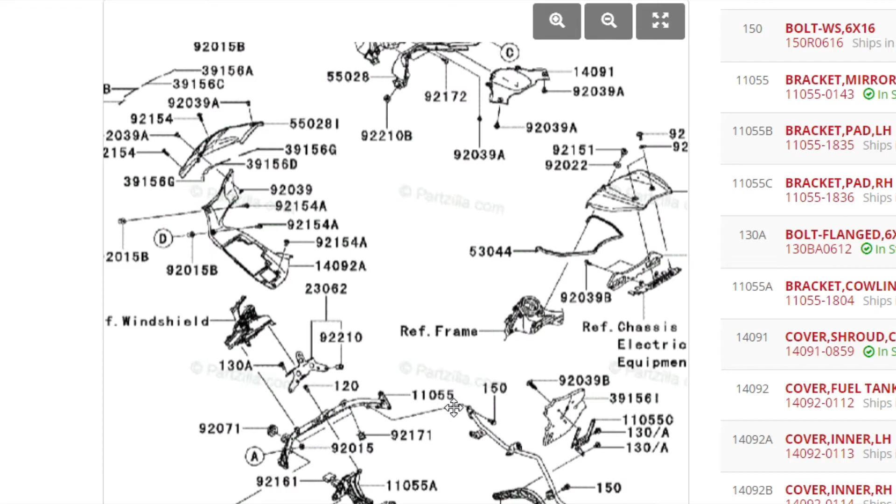And once you figure that out, even on a complicated or busy drawing like this, the next thing is to simply reference the number that identifies it to the number over here in the list. Now, Kawasaki, and I'm not sure about the other ones, but Kawasaki for sure likes to use essentially a 5-digit part number dash 3-digit. Now, you don't see the dash 3-digit up here. You simply see the 5-digit first part of the hyphenated part number.

So let's take this 92039 here for example. If we wanted that, I'm not really sure what it is, but we'll take a look. 92039, we scroll down here.

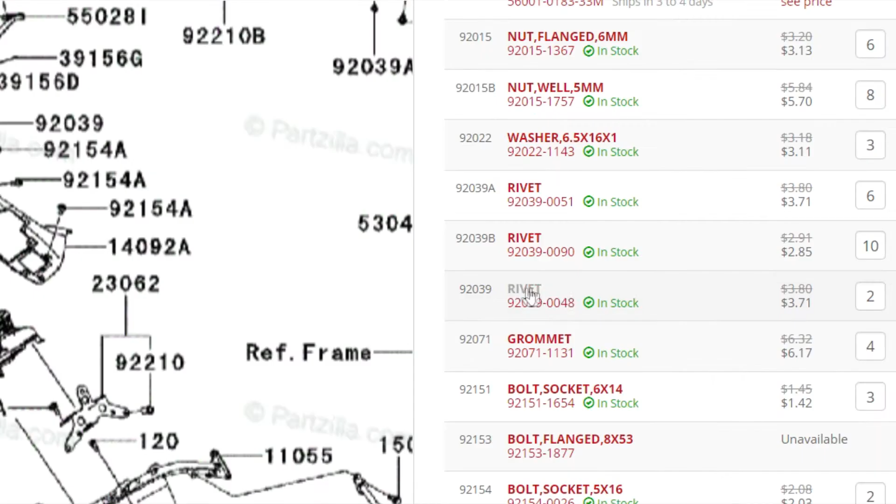It's one of those push nails, or rivets, those plastic deals that always break when you try to either take them out or put them in. If you needed those, it'd be pretty simple to order them, or if you wanted just the part number to check with your dealer, you can open that up and look right here - here's the actual part number. This is actually a -4, some are -3. So 92039 0048. If you called your local Kawasaki dealer and gave them that part number in its entirety, they would be looking at the same thing.

One thing to understand here is that the OEM parts fiches are all the same no matter what place you're looking them up online. So if it's motosport.com or Bike Bandit or whatever, they're all referencing the same material.

Most of them have a drill-down list like this up here. Let's start back at the main screen to show you how that builds. When you open it up and hit Kawasaki, you see how it starts - catalog, Kawasaki, motorcycle, there it is. And then we go to, let's say, 2012, and then to the Concours 14.

It expands out, and the reason this is important is if you go, okay, let me go into here, front brake, and then go, oh crap, I didn't want this one - you don't necessarily have to hit the back button. You can if you want, but all you have to do is go up here and hit the bike again, and it brings you right back to that level, or levels I guess you'd call it.

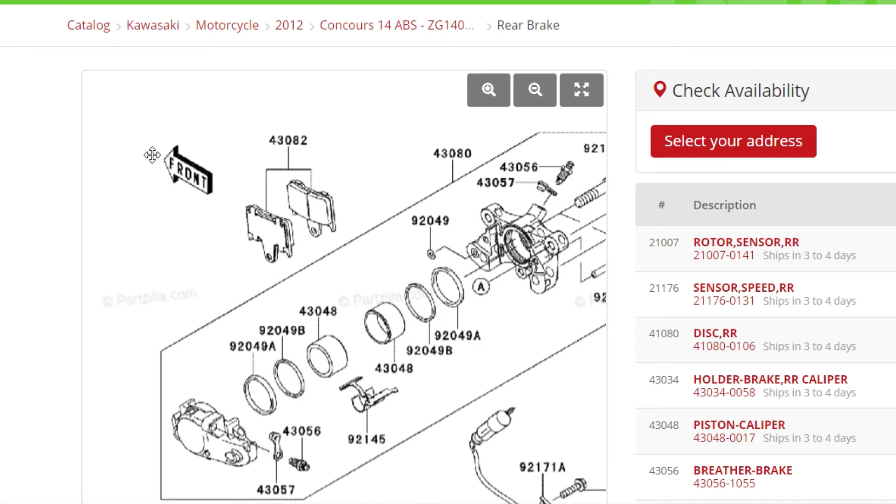So then you can scroll around and look at different things. Let's look at one more - the rear brake. So if you needed brake pads, again, look up whatever parts you need. Here's again that front reference, and so there you go, and then you can pick what you want.

Another thing to keep in mind is on most of these parts fiches, they will give you a quantity that the OEM says is required for whatever this part applies in this assembly, or this fiche. In this case, 2 right there, that you will need for this assembly here. So that's another thing to keep in mind.

Adding it to the cart and doing all that stuff is sometimes unique to the particular website, but you can figure that out. We're going to go over to motosport.com and take a look at how theirs is set up. Now, theirs is a little different, and I have a little experience with this one. I think the best thing to do is just follow this drill-down up here.

You can go through this way too, but if you just go to select riding style and say street bike, and then let's say Honda, and then a 2002 - there it is, my eyes are screwed up here today. And let's look at ST1100, doesn't matter. Okay, so now you get that populated in here, and it shows you 2 choices right there, aftermarket and OEM. If you want aftermarket, that's fine. The aftermarket will be almost exclusively unique to whatever they're selling versus the other ones. But OEM, again, it's the same information, same part by part number.

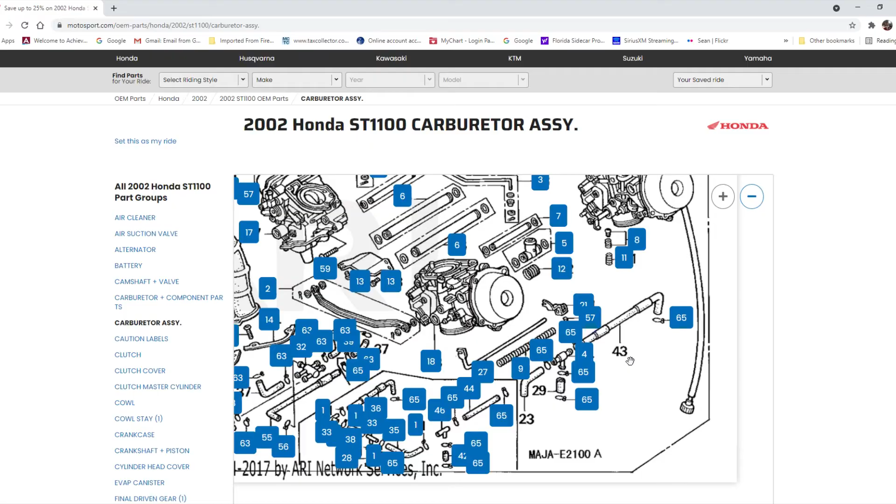So basically, you can also scroll down here and see the same thing. And as you notice, these reference just 1 or 2 digit part numbers, as opposed to that 5-digit slash-3 or 4 digit that Kawasaki does. So like, for example, 43, so forth, 65. Let's see what 65 is if we go down here on the list. I don't even know, I've never been in this fiche before, but it just looked good. Nice bike, by the way, ST.

So this is a clip for a tube. They have it in stock. And we click on it, and they don't have a picture of it, but they do give you the Honda part number. This is definitely what a Honda OEM label would look like. In fact, it would come in a bag that has this exact label on it. So, unless it's a box, like for something big. So that's pretty straightforward too.

It all depends on the complexity of the parts fiche. So let's go down here back. We're going to go just back to main Honda and start over. And as you can see, every website does it a little differently.

And again, Motosport, you can get to the same place just multiple ways. So here's an entire list of everything that they have, all the way down to whatever year they're covering as far as the Honda parts availability.

I'm going to tell you one other thing about that over on the Partzilla site. Don't let me forget. But let's go up here and we'll go to the. I just saw one I want to look at, which will be pretty, I think, entertaining for you. Let's take a look at this 2020 Honda Grom, little kind of mini bike.

And again, it gives you the same thing with a bunch of pictures. And all you do is just select the system that you're looking for or the assembly you're looking for. And if you need like fuel tank parts, then you'd go over here. And it's a little simpler of a parts fiche to navigate through. But as you can see, this is a fuel injected bike, so it has a fuel pump. And then it has all the associated stuff about that. So again, just buying parts, straightforward, pretty much the same as the other websites that you can go to.

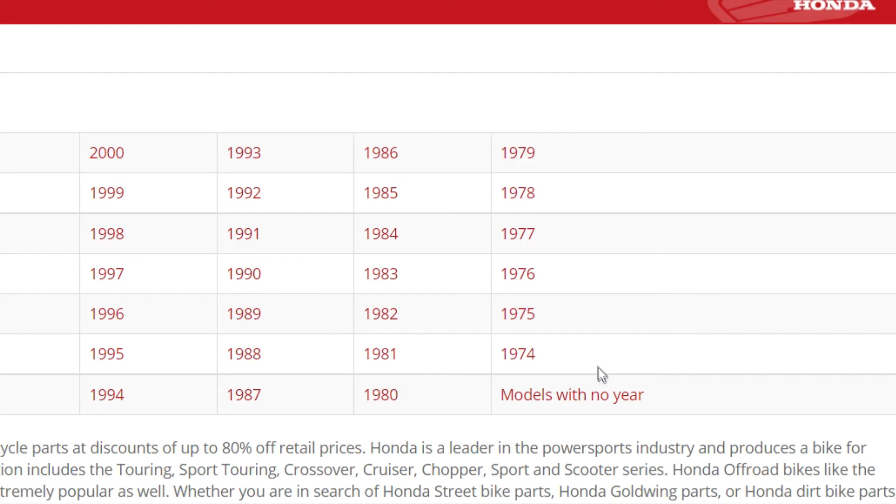I'm going to go back to Partzilla, and I want to show you that one thing about Honda in particular. I don't know about the other brands. But let's say you're working on a really old antique Honda, like in the early 70s, for example, or something, that may be a little bit unusual or before 1974. You see the selection right here. It says models with no year. This is going to be your best friend if you got something like that.

Because you click on that, and then you have all these models that are not necessarily assigned to a year in their system. In other words, you don't look them up by year, you look them up by model. So if you wanted to look up a CL77, you click on that, and it will give you that bike. Now, you have to ask yourself, well, does that year on my machine correspond with this particular parts fiche? Maybe, maybe not. And that's where a little bit of detective work comes in, where if you're trying to find OEM parts and you're using this particular feature on their website, you're going to have to essentially look through it

and see if things apply directly to what your bike is or bike has. Because there are different variations even mid-year that they make changes of. But even then, and this is probably a bad example, but if you were in a different bike, because there's only one CL77A listed here, if you're in a different bike like a CL70 and you clicked on one of these and it didn't quite match up, you just click one of the other choices here. You see you have a K1, K2, and K3. So again, that's part of your detective work. You have to look around and say, what model do I have? Do I have multiple choices in that particular model?

And if you do, then you pick the one that matches your particular unit that you have in front of you the most exact. That's pretty much the simple explanation.

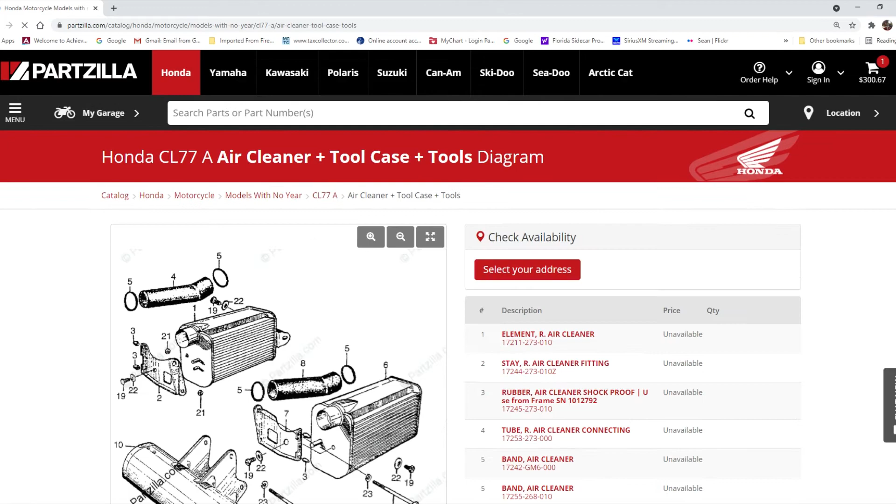So if we wanted to look up air cleaner stuff for that particular bike, and you were like, well, I need parts for my air cleaner, this is where we would look. They even have a toolkit. Good luck getting that. And then this is where you'd go for that.

So what is number 6? This is the Element Air Cleaner. It's currently unavailable, at least new. But let's say you really wanted to get one, and it's in the aftermarket, and you didn't know where to look. What you can do is click on that, take this number, and then Google it, and you're sure to find somebody that sells it in the aftermarket. And usually they reference the OEM part number for that purpose.

All right, so pretty simple stuff. That about covers the buying of stuff straightforward, that particular segment.

Now let's look into using it as a mechanism to see how things are put together. Pretty much the same thing, but you're a little bit more targeted. Let me give you an example of this.

If I go to Kawasaki, I was just working on a 78 Z1R, and I had to figure out something in regards to the steering head. And so this is another nuance of operating in parts fiches: you got to kind of figure out which parts fiche within that model is where the thing you're looking for lies.

So we'll go ahead and get into the Z1R here if I can find it again. There she is, Z1R, the KZ1000 D1. I was looking up a steering head thing. I wanted to see how something was put together before I drove a bearing off the steering stem, because we're going to be replacing those. This is a fairly extensive restoration that we're starting right now for a customer.

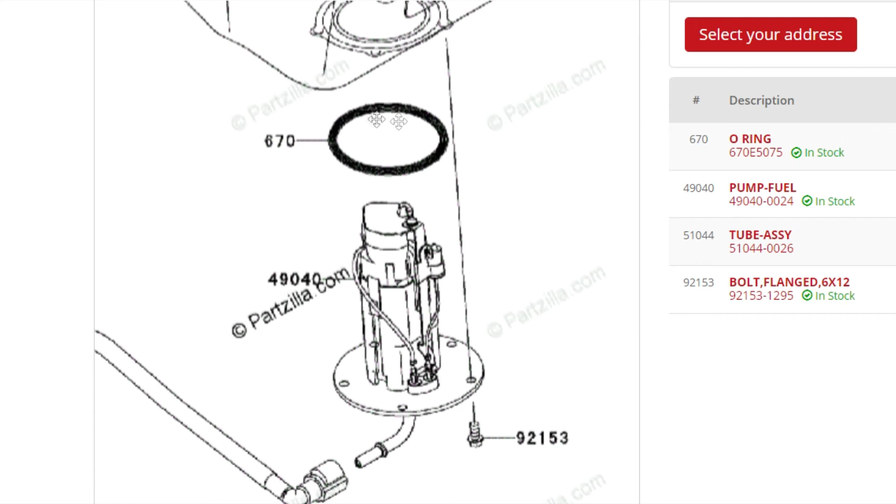Flipping around, as you can see, you have a fuel pump, and the only thing broken out on the fuel pump is this big O-ring right here, and maybe this bolt, but you'd essentially say to yourself, wait a minute, I've got to buy an entire fuel pump. When it says sign in to see price, it's expensive - kind of like if you have to ask, you can't afford it, like buying a boat. So I thought to myself, there's got to be another way to do this.

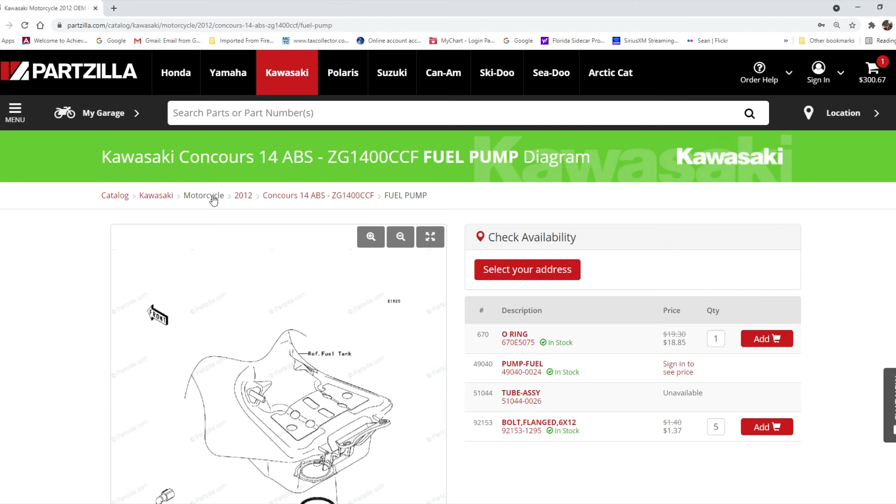So here's what you can do in this situation. We're going to go back to motorcycle, and instead of 2012, I'm going to go to 2016, and click the ZG 1400, the Concours 14 again. Then I'm going to go to fuel pump on that. Let me get down there first, and voila, look what we have - that's not a misprint.

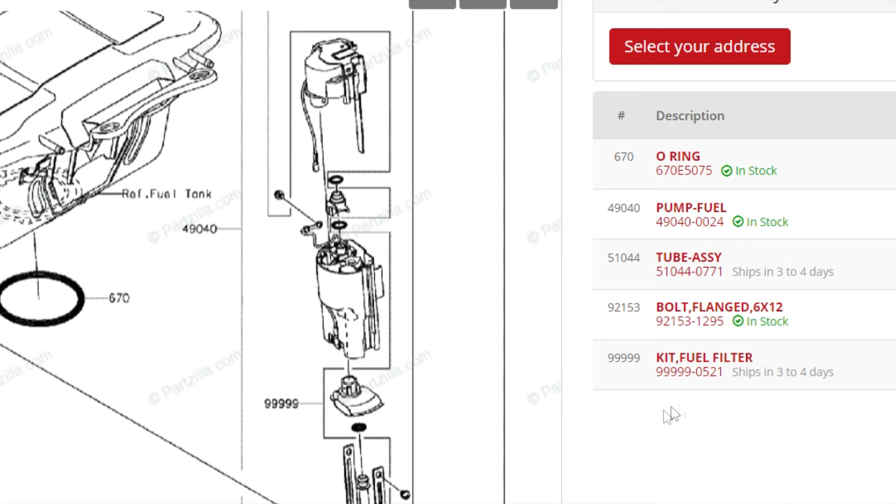They just use 5 nines and whatever comes after, 3 or 4. So here we go, look at this - kit, fuel filter. Now, there is absolutely zero difference between the fuel pump on a '16 as opposed to a '12. They just decided on the '16 to break this out into a separate part you can buy.

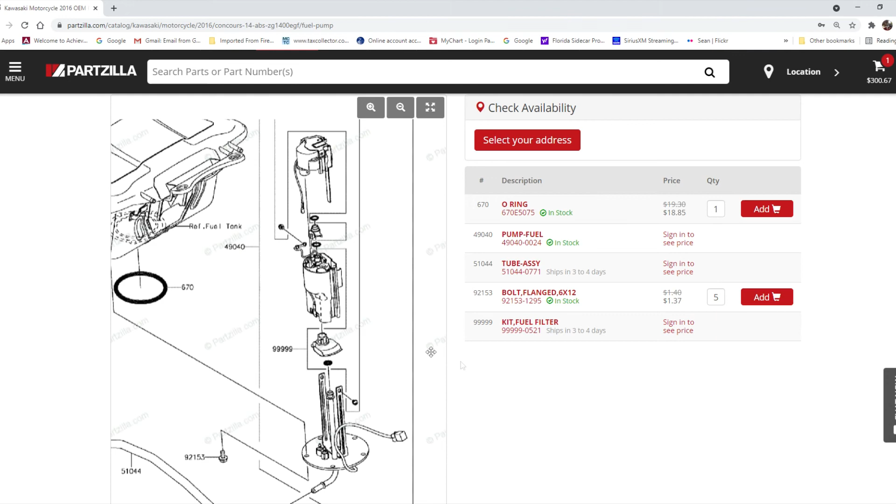That's exactly what I did - I ordered the fuel filter kit. It came with all the O-rings and everything, and I installed it, and it worked perfectly. So that's one quick example of how you can look around and figure things out. Forums can help, and Facebook groups for your bike can help too, because somebody may say, hey, don't go to a '12, go to a '16, and you can find it. So that's just another example of what you can use this for.

I'll show you one other quick thing, and that's aftermarket - not necessarily OEM parts. I like to use Bike Bandit for things like tires, because I think they have a really good engine for looking through and getting tires. If you need a set of tires, it's pretty easy to do - one of the easiest websites I've ever found for that.

So if you wanted to get sport bike tires, for example, you can go in here, and I really like this layout because on the left side, they give you brand, rim size, front and rear, suggested use, tube or tubeless, and all these different selections. The big one is your tire size - so you can scroll down, say you want a 190/50-17, then click on that, and it gives you all the 190/50-17s, and you can pick the one you want.

I do like Bike Bandit for looking through their tires. I think they just have one of the better websites for figuring out which one you want - in other words, you don't have to drill down so far. It's kind of frustrating when you've got to click 18 times to get to a particular tire, and with this one, clearly, you do not have to do that.